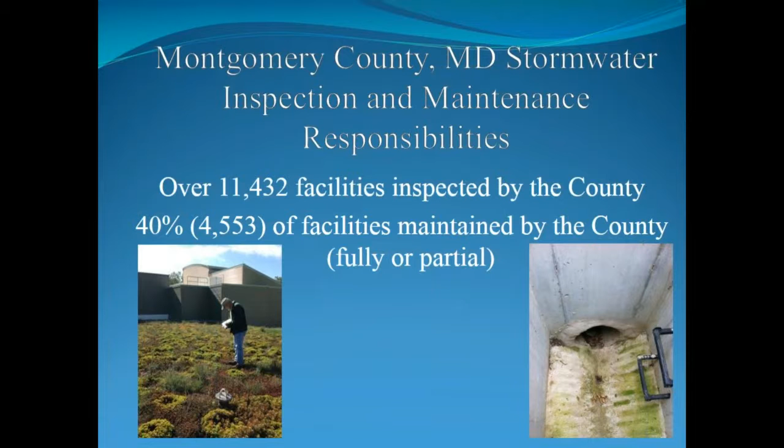About 40% of those facilities are actually maintained either fully or partially by the county themselves, both on public property and within what we call our transfer program, where private property owners can transfer their stormwater facilities into our program. There, we maintain the structural part of the facility and they maintain the landscape part of the facility.

Of those practices, we're quickly going to see that we'll reach probably 50% or more in terms of those practices being ESD or LID practices—the small practices that are green, typically have things growing in them. The number keeps growing, but right now about 42% of our permitted practices are within this category, and I think we're going to see that across the country as well. This is a list of how that breaks out; you can see the bulk of the practices that are permitted are dry wells, a rather large number there.

The two columns here, the permitted ones have to go through permitting services, meaning they're regulated by law. The Rainscapes projects are voluntary projects that the county assists with funding for people to do on a voluntary basis.

Our second largest number is in the bioretention, microbioretention, bioswale, rain garden group, and that is forever growing as well. Then we have dry swales, microinfiltration, porous pavement, tree boxes, green roofs, and rain barrels and cisterns, sort of going down the line in terms of the numbers of practices that we have.

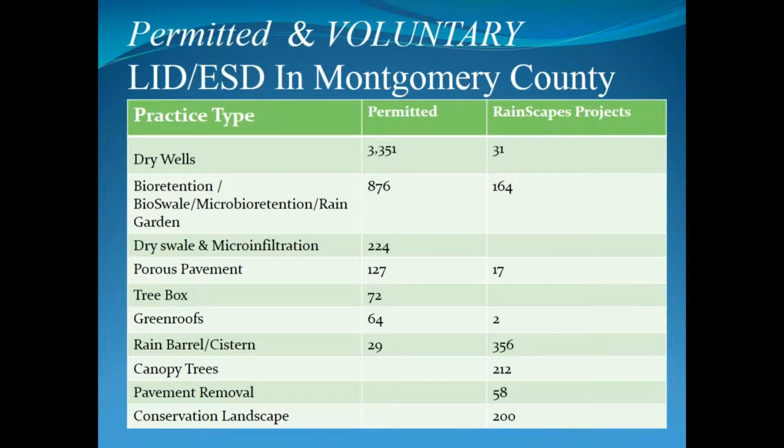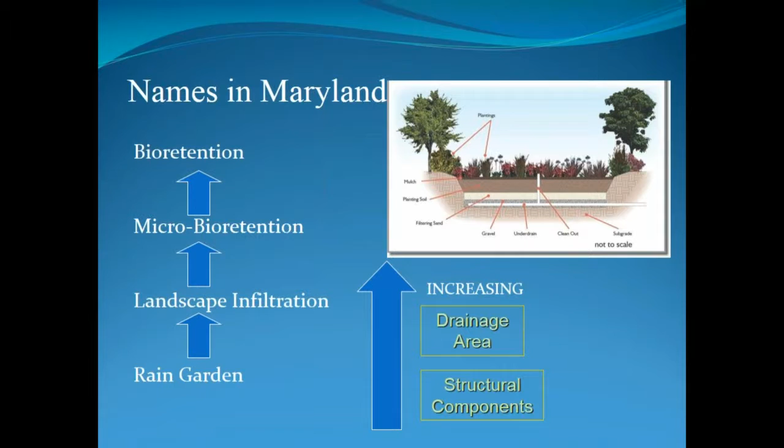In Maryland, every state is different, but here there are different names for how things are categorized, starting with green infiltration practices at the bottom. We have rain gardens, then landscape infiltration, then microbioretention and bioretention. As we go up, they have more structural components and a larger drainage area. The rain gardens are smaller with less structural components and less water, while the bioretentions at the top have a lot more structural components and drain larger areas.

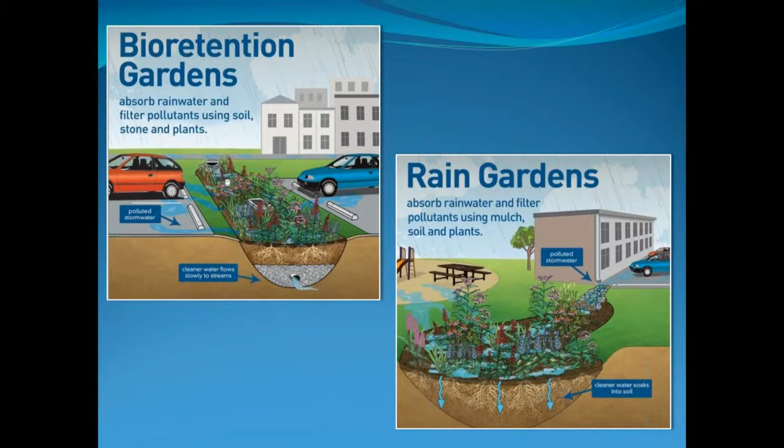The bioretention gardens and rain gardens are the terms we use most often, and I'll probably just refer to them as bios or rain gardens throughout the presentation for ease of presentation.

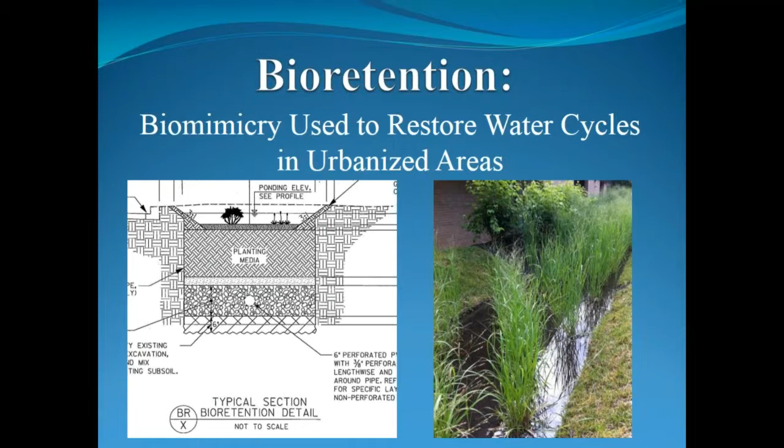So what is bioretention or rain gardens? It's really biomimicry we're using to restore the water cycles of our urbanized areas. We're essentially trying to make them act like the woods or meadows would have done. Typically they have a gravel storage base underneath a very loose planting media that's planted on top, and some have under drains or over drains that take excess water out. The idea is that water is slowed, cooled, and cleaned before it makes it back out to the streams. It can work very well when it's designed right and if there's a maintenance program going on with it.

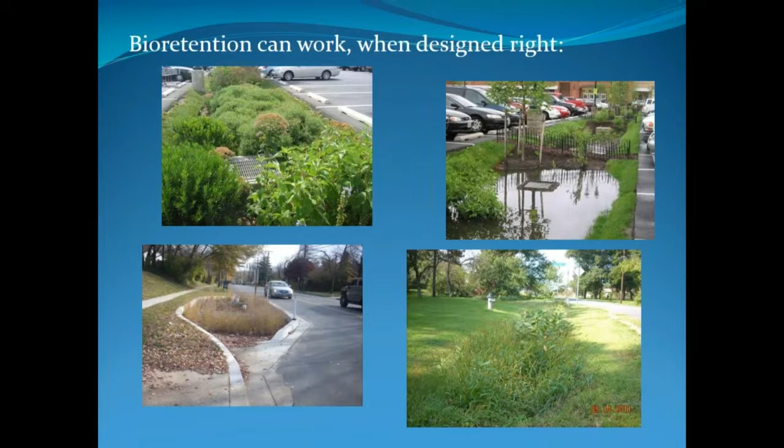So these are some photos of well-maintained, working bioretentions or rain gardens that we have around the county.

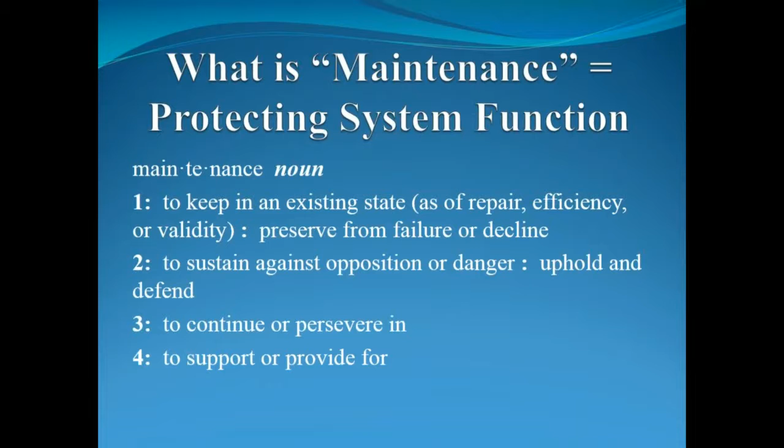So what is maintenance? If you take it out of the dictionary, this is what you see. And this is what a lot of people forget that we need within our systems, our budgets, and our programs. But basically it's protecting them against the influences on them, preserving them in the state they're in, and keeping them from declining. So this is what our program is doing on a daily basis.

This is what we have to do. If we're going to use a bathroom, we have to clean it. If we're going to use a ship, we have to clean the holds. If we're going to use our cast iron pots, we have to take care of them. There's nothing different about the landscaping budget, and I think we just have to get that into people's minds and make sure we're not building things without a maintenance budget.

So quick review of all the things that are in stormwater, and again, I'm going to focus a lot along the roadways, some of the major impacts that I have.

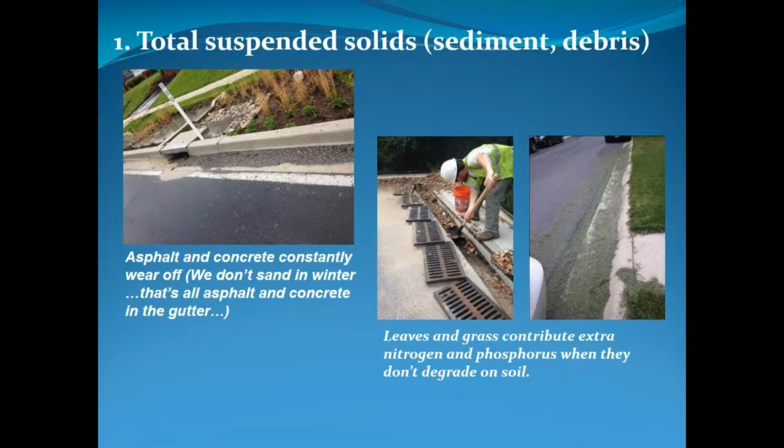We have huge volumes of leaves and grass clippings and organic materials falling into our roadways as well. They're contributing nitrogen and phosphorus because if they're not degrading on soil, they're going straight into our water bodies, which end up in the Chesapeake Bay.

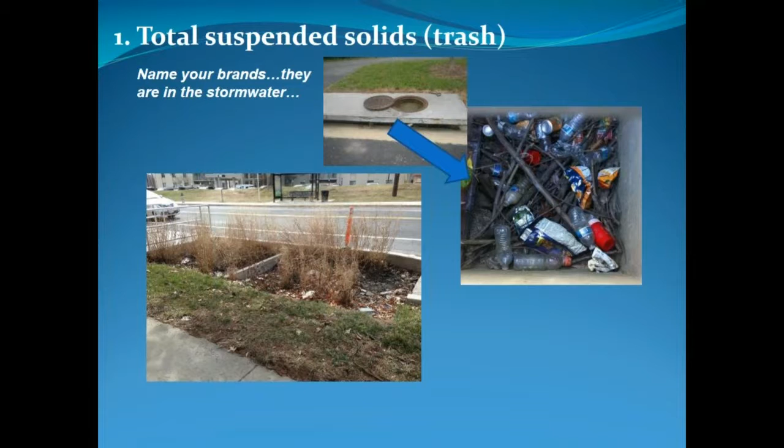Then we have tons of suspended solids, especially things like trash. We've got that no matter where you are, but as you get into more urbanized areas, there just tends to be a higher volume of trash for multiple reasons.

Then there's the chemicals, a lot of these things that people don't actually see that are going into the water. We've got heavy winter salting that happens around here. Every time you hit the brakes on your car, heavy metals fall off of those brakes and end up on the roadways and then in our stormwater.

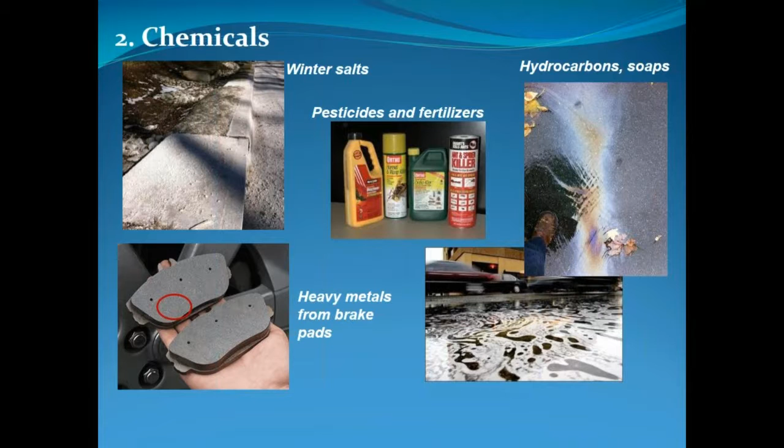We've got all sorts of pesticides and fertilizers running off of lawns, plenty of hydrocarbons, petrochemicals, and soaps coming off of our vehicles and buildings, and from illicit discharge as well. All of that is impacting what goes in there. Then there's even more unseen things like bacteria coming off of trash cans and from animal waste. We've got superheated roads when the sun is shining on them, and that heats up the water, which can impact aquatic life. And then, of course, we have the concentrated stormwater, which is one of the largest issues in terms of the health of our streams.

So these are some pictures of some of the things that we clean out on a regular basis from our roadside stormwater systems. The upper left-hand picture has tons of cigarette butts and just organic debris. We've got trash, we've got sediment. The lower left-hand picture, that bucket, is the type of sediment we get when water mains break. So instead of the water main break going straight to a stream outfall, it goes into our roadside LID, and we have to clean those up as well. Lots of things people don't think about.

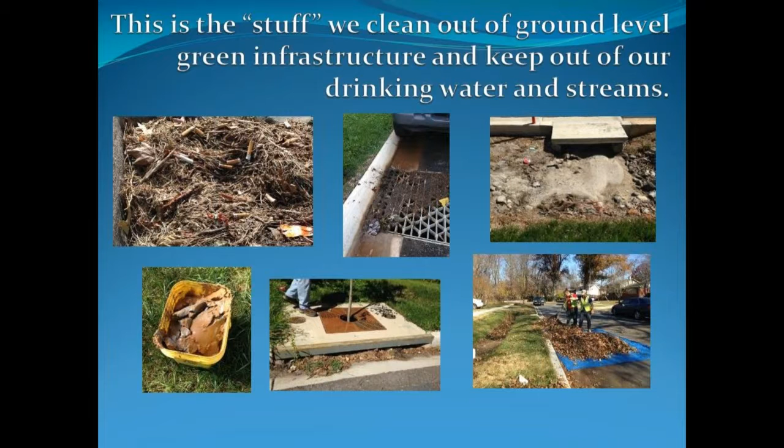Google isn't driving cars for us yet, so we get vehicles in it. We've got people in them, we've got kids in them. You name it, we've got the impact.

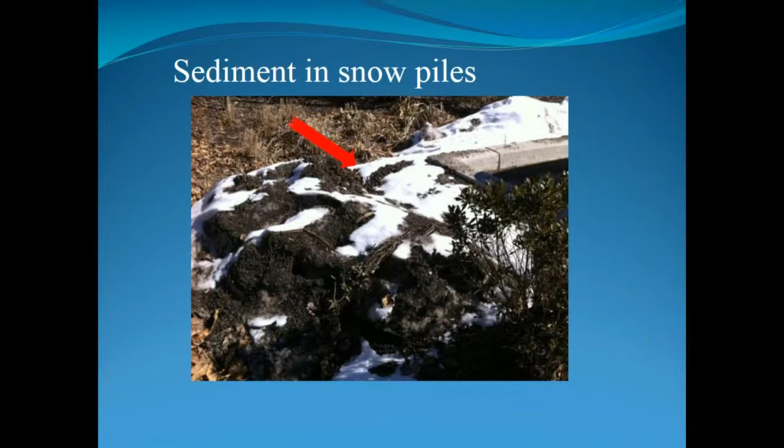So sediment is a huge issue. As I showed you before, there's a lot of sediment, but also when we push snow around, there's a lot of sediment that ends up in that snow. This sediment pile is actually in the inlet of a road or parking lot bioretention, and all of that sediment in that picture came in with the snow that was being pushed directly into the facility.

We did a study a few years ago of roadway sediment within the county, looking at multiple sites where we had roadside LID. Right before our crew would go out on a monthly basis, they would take out and measure the volume and weight of the sediment, and then characterized the nitrogen in it as well. They would dry it down and found that for every inlet, they were getting 4 to 9 pounds of dry sediment every month. That meant 52 to 104 pounds of dry sediment per inlet per year. When we multiplied that by the number of roadway LIDs we had at the time, it meant we were taking out quite a few tons of dry sediment per year just from what was coming off the roadways. That's pretty significant.

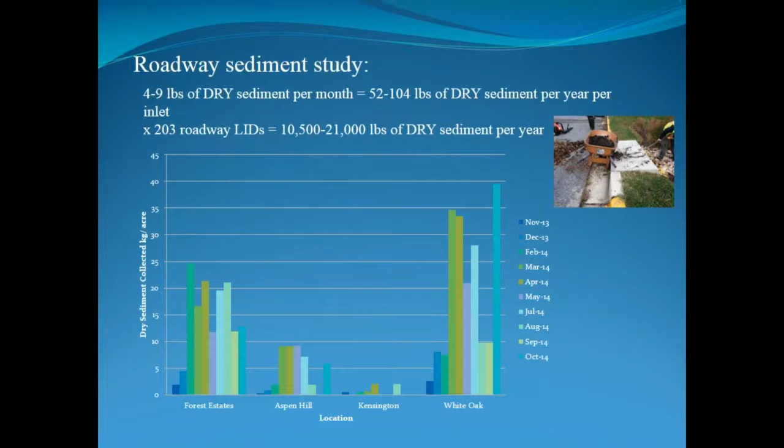So just a quick stop there before I get into maintenance. Sylvan, is there any questions so far?

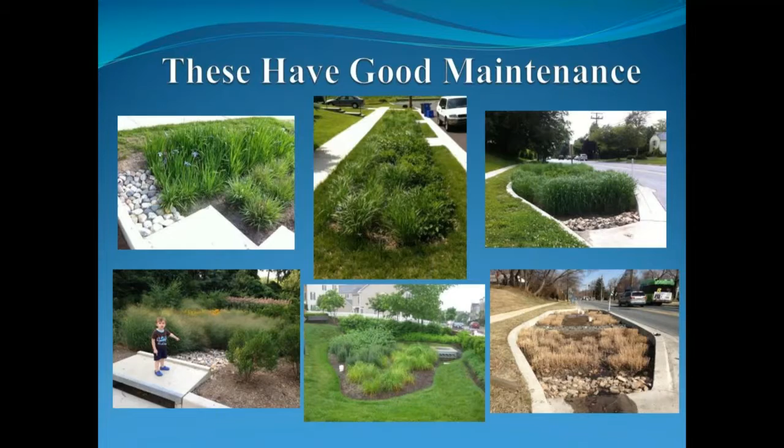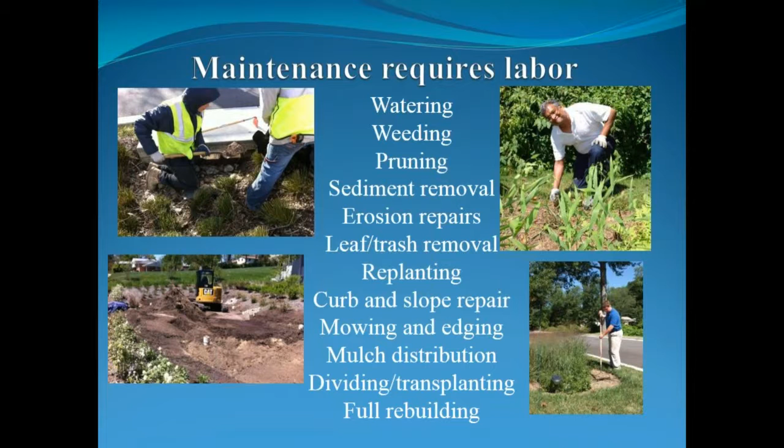So maintenance requires a lot of labor, we know that about all things. This is a list of all the types of things we're doing on a regular basis. The things towards the top we're doing regularly, like weeding and pruning, taking out leaves and trash, mowing and edging, redistributing mulch after a storm. Some of these, like fully rebuilding or replanting them or patching erosion, are on an as-needed basis, but they're something we always need to be able to budget for in all of our facilities.

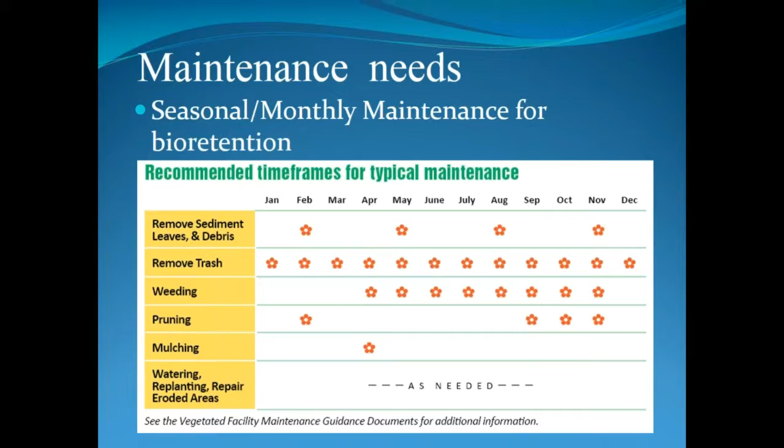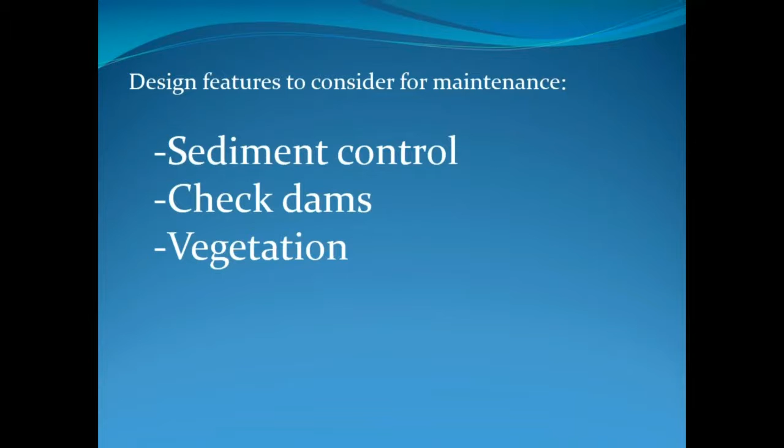Just want to go through some design features that make a difference for maintenance. There's all sorts of different ways that people are controlling sediment in these, different designs of check dams, and different types of vegetation. So I'm going to go rather quickly through the next set of slides just to give you an idea of the diversity of things we're dealing with and that you may deal with as well.

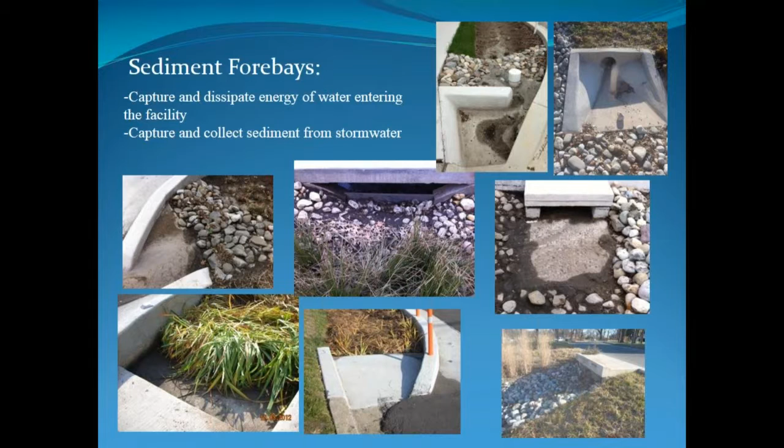Sediment forebays, these are all different kinds of forebays in our LID practices. We have to recognize that these small LID practices, particularly along roadsides, don't really have a traditional forebay—there's no room for one within them. So the facility itself is almost a forebay in and of itself, but we'll essentially have these micro forebays, and these are the different types we see within our facilities. This is one type where the water just drops over and dissipates a little bit of energy as it comes out, and there's a concrete pad where we can scrape the sediment off.

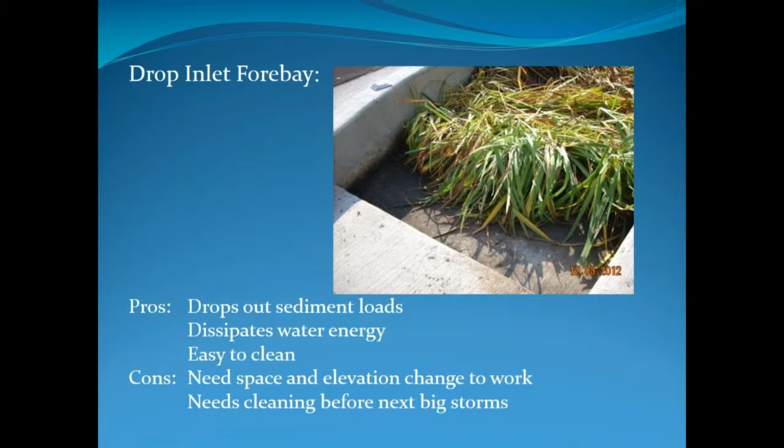I've put on here pros and cons of the different types of forebays. Another forebay is not too different, where there's a pad that the sediment can drop out on, but also with the flow of water coming in, we're trying to have it bump up against this little Z-shaped inlet curbing so it will slow down and capture that sediment. You can see, though, even after a big storm, it will push the sediment past that area if you're not cleaning it out regularly. Then we just have flat concrete forebays where water literally just goes into them.

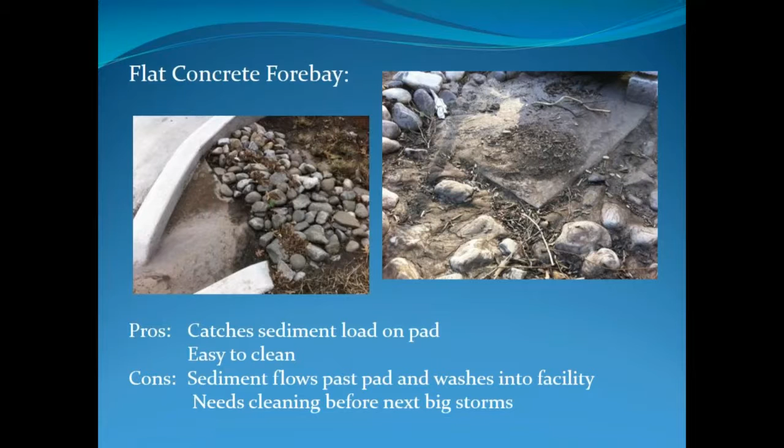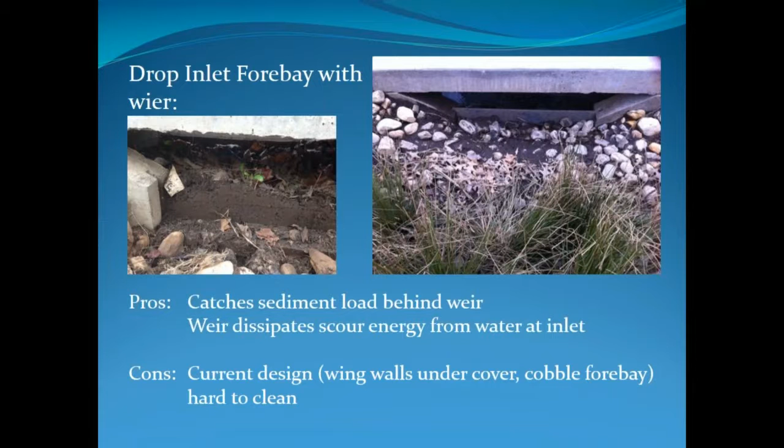There is no dropout—there might be cobble to dissipate the energy. And then we have some that have weirs. The picture in the upper right shows a large plastic weir that can be lifted out, and on the bottom left you can see where that weir was pulled up and the amount of sediment that got captured behind it. The weir has holes so that we're not holding water within the inlet, but we're holding sediment within the inlet that we can then clean out rather than have it get into the facility.

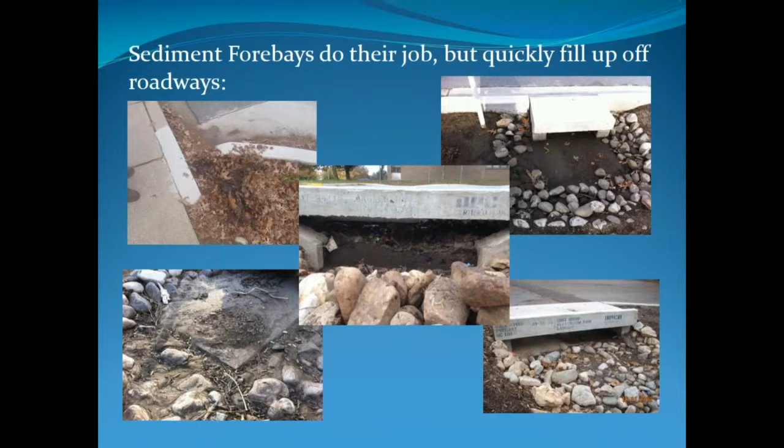They do their job quite well sometimes, but they quickly fill up, especially along roadways, with the amount of organics and inorganics that come into them. So on a monthly basis we need to keep cleaning these out, otherwise they very quickly get filled up. Also, sediment will move past these forebays—the volumes of sediment from roadways can be really heavy, and if you have sand in your community for winter use, you're going to have even more than we do.

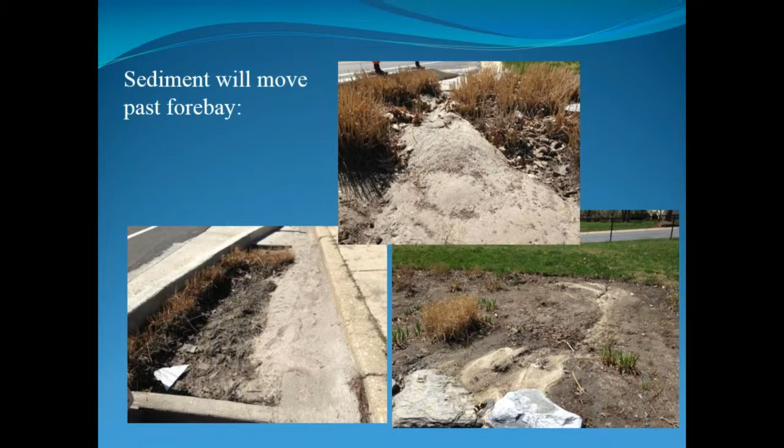Here's just some pictures of sedimentation where it's moved beyond the forebay. This is after winter, where heavy winter storms, etc., and we haven't been out there maintaining—that's how much sediment gets past the forebay and into there. It's rather large volumes. So one thing we do is constantly clear the sediment and debris from the inlets, and we also clean upstream of the inlet, so after the next storm whatever's within 5 to 10 feet above that inlet ideally isn't flowing into it. Otherwise, it's a little bit harder to clean out.

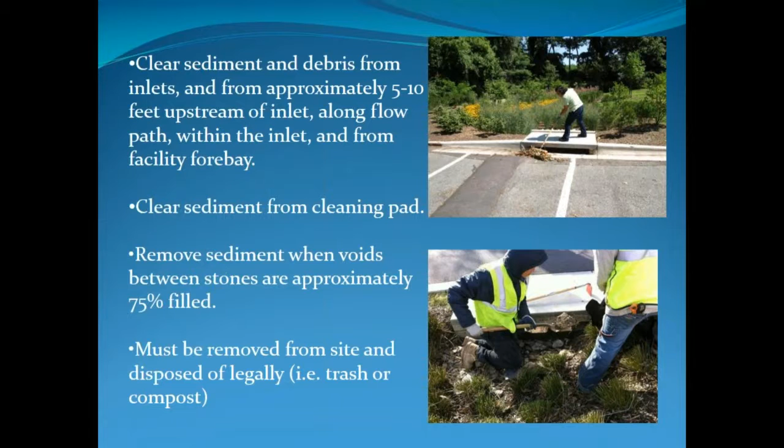We're cleaning out the sediment from the cleaning pads below the inlets. When the stones past the inlets are filled by approximately 75%, we're lifting the stone out, taking the sediment out, and putting the stone back in. Then, of course, this has to be taken off site—there's nowhere nearby to just toss it, so it goes into the trash or into a compost facility. Most likely it's going to go into the trash if it's not leaves.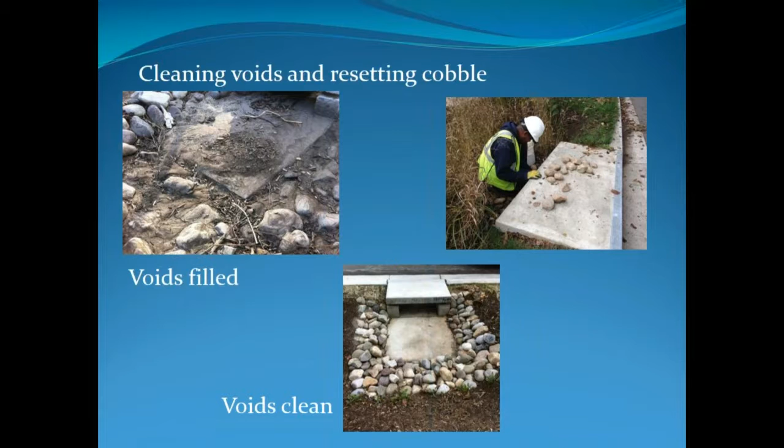Without frequent maintenance, our inlets can look like the one at the top, and with frequent maintenance, they look like the ones at the bottom.

We also have trench drains that feed facilities, and people often forget about drains that are not immediately adjacent to their facilities. So it's always important to go upstream and look at where the water comes from and clean those out as well.

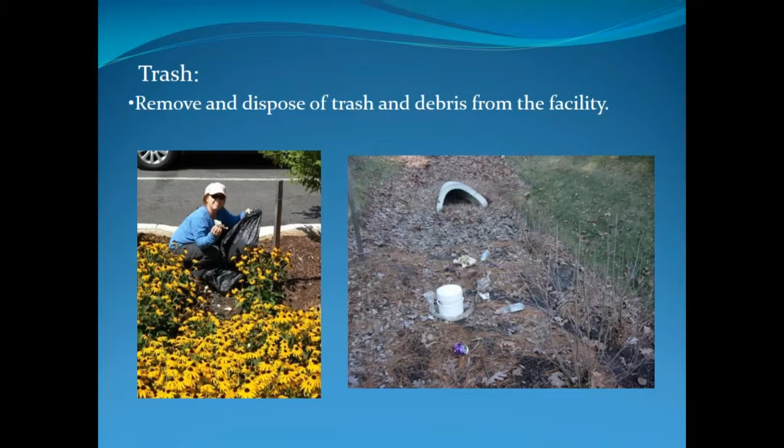We're constantly taking trash out of them, as well as debris and leaves from within the facility. If we can capture that at the inlet, it's going to save us a lot more work before it moves past the inlets.

We also have to take trash and debris from control structures. There are flow splitters that go to some of these, and again, we've got to have our crew know what's upstream so they can go and lift the manholes and clean them. Facility control structures sometimes have trash in them, and it's not just from stormwater.

The bottom left-hand picture shows kids throwing stuff in there, because those large bottles did not fit through those grates unless somebody forced them through. So we've always got to look at all of our upstream and downstream control structures to take trash out.

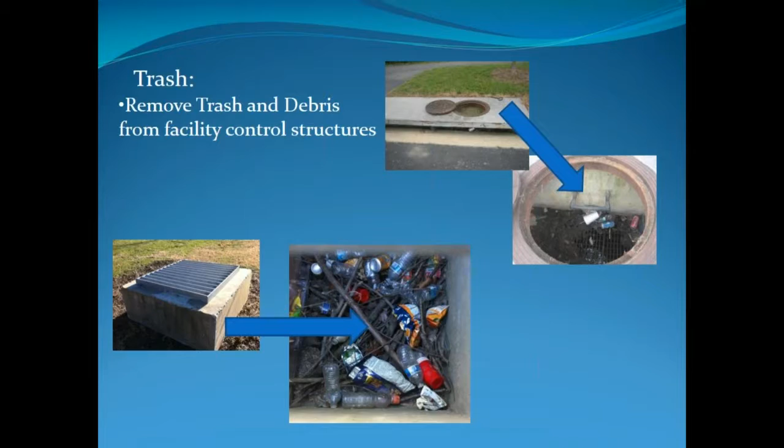As for leaf and natural debris, it's the time of year in our area where leaves have started to fall, and we are taking out large volumes of leaves. Because stormwater facilities are usually lower than the surrounding grades, they sometimes get even more leaves in them because things like to blow downhill and into them.

That's a large job in the fall that has to be factored into our region's maintenance.

Any questions, Sylvan?

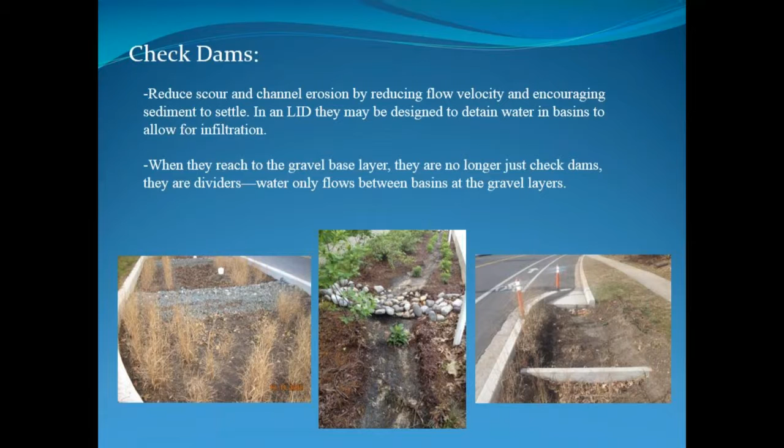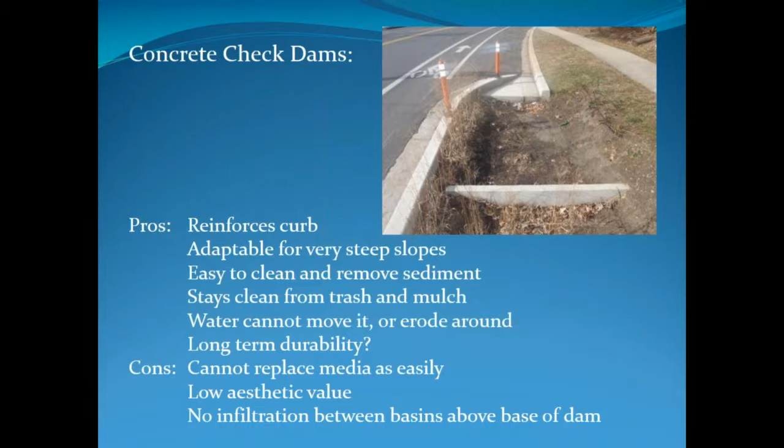Another style of check dam used is gravel check dams. These are basically soil and gravel packed together to create more of what I would call a berm than a check dam. They lock together pretty well and are pretty resistant to erosion.

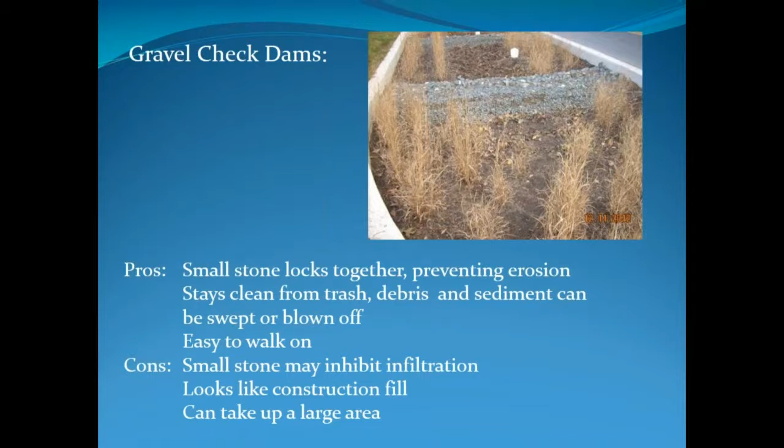They're relatively resistant to cars driving over them because they have to be a little more bulky, so they provide a larger apron if something travels over it. Water can't get through them, much like a concrete check dam. It has to go up and over them.

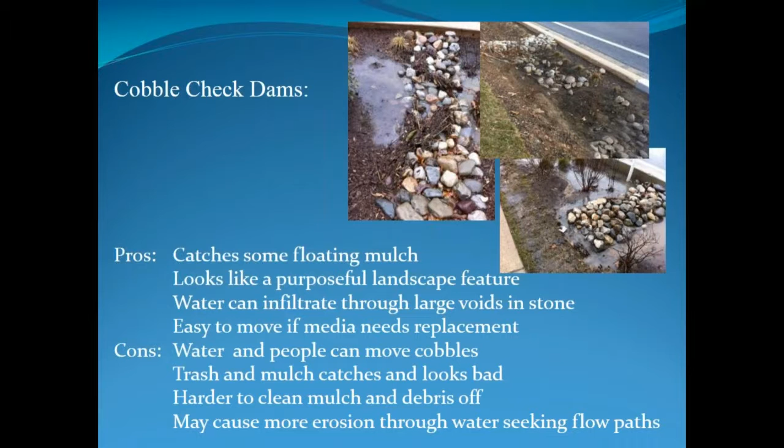A lot of people are now using cobble check dams, or river cobble, which is perhaps more visually acceptable to the public, but those cobbles move and get dirty pretty fast catching sediment and debris. With a concrete or gravel check dam, debris doesn't get stuck in it and you can take it off easily. Cobble check dams are a fair bit more maintenance, at least in my experience.

Vegetation is one of the most critical things to a lot of these systems. It's also an engineering component, not just for transpiration and evapotranspiration, but the roots provide infiltration channels and keep the soil loose. They also slow down and help cool the stormwater. So the maintenance and choice of vegetation is really significant.

All the vegetation has to be appropriate for the use. This is one of the major challenges in balancing aesthetics of these roadside and other facilities with the engineering component, since these facilities are sometimes exceedingly wet, and when not wet, might as well be a desert because the soil is so well drained. We have a very limited palette of plants that can handle conditions where most of the time they're dry and stressed, and every so often their feet are wet for a day or two.

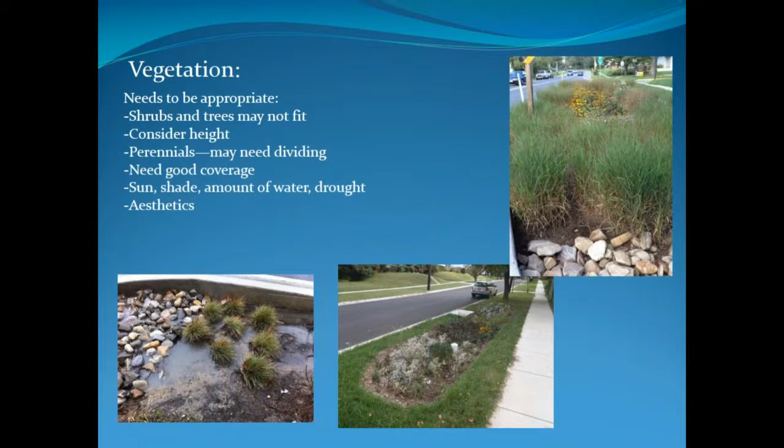And then, of course, we're trying to balance the aesthetics as well as things like sun and shade and sight lines.

Keeping that vegetation well maintained, one of the most important things we're constantly doing is removing weeds. This was a really bad year for weeds in our area, so it took a lot more effort than some other years, and weeds are constantly popping up through the seasons.

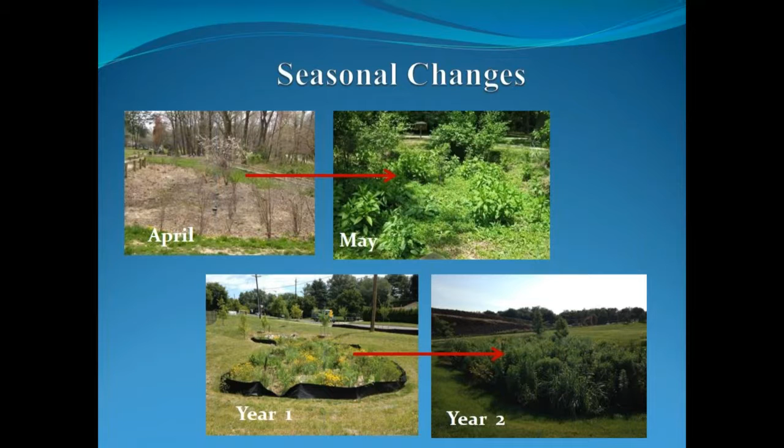We've got major seasonal changes both within one season and within growth years. The upper picture is the same facility in April and then May, showing how quickly it changes. The lower facility shows the difference between the first year when it was just built and the second year - those plants are now 6 feet tall. A big difference in what we see and how maintenance changes throughout the year.

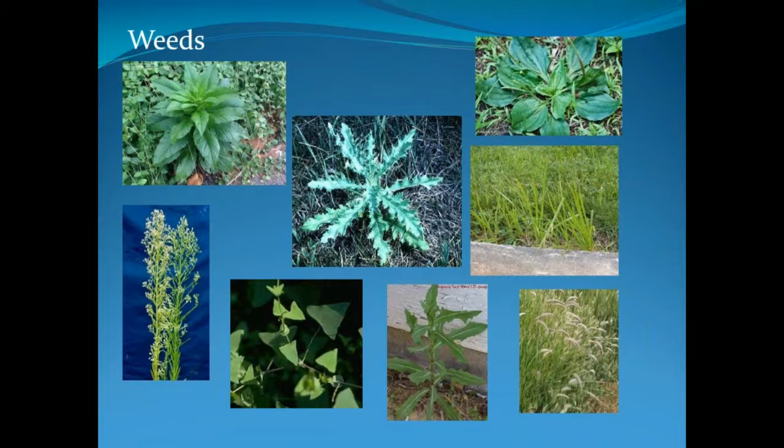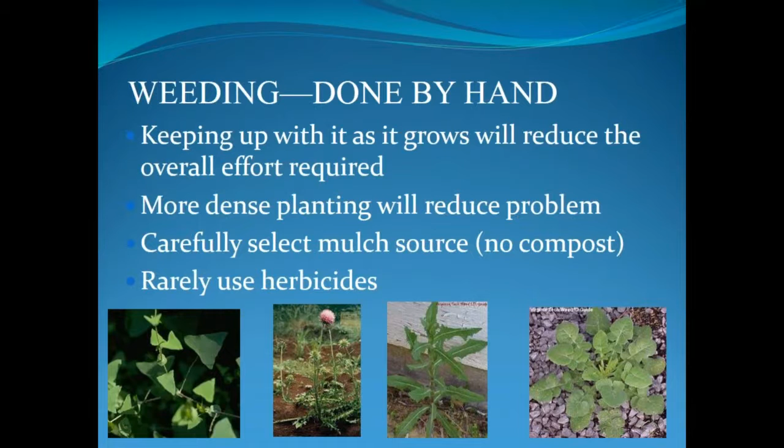We do all of our weeding by hand. We don't do any chemical weeding. The denser the planting, the easier it is to maintain, and keeping up with weeding efforts means it's not as bad the next time you show up. For mulch sources, it's really important to avoid municipal mulch compost that can have a lot of seeds in it. It's very rare that an herbicide would be used - that would be under an extreme situation.

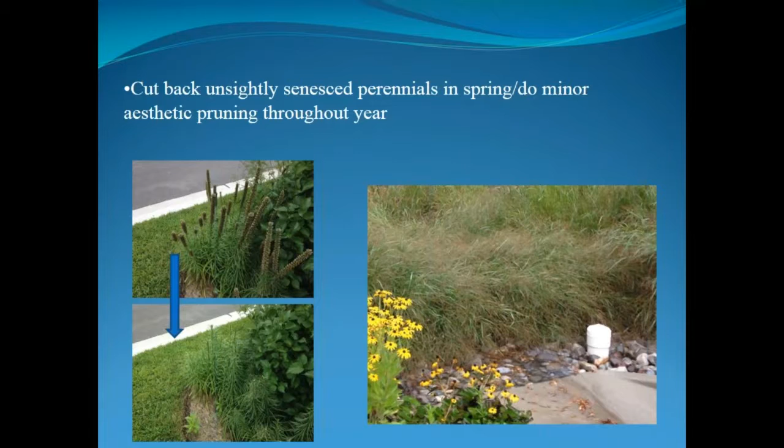Some pictures of well-maintained vegetation. We cut back unsightly perennials and do aesthetic pruning throughout the year, but typically prune in the spring and let things stand in the winter. There's a couple reasons for this - one is that a lot of these facilities have mulch. This facility had been pruned before winter, and this is what it looked like in midwinter because the mulch floats, moves around, and buries it. If the standing plants are left there, the mulch doesn't move.

Also, because these are stormwater facilities, there's a higher risk of root freeze if the plants are cut short - water can get into the roots and take on freeze-thaw action, busting apart and damaging the root ball. Then we might have a higher mortality rate. So we typically don't do the extreme pruning until spring. Another thing we do is constantly redistribute mulch.

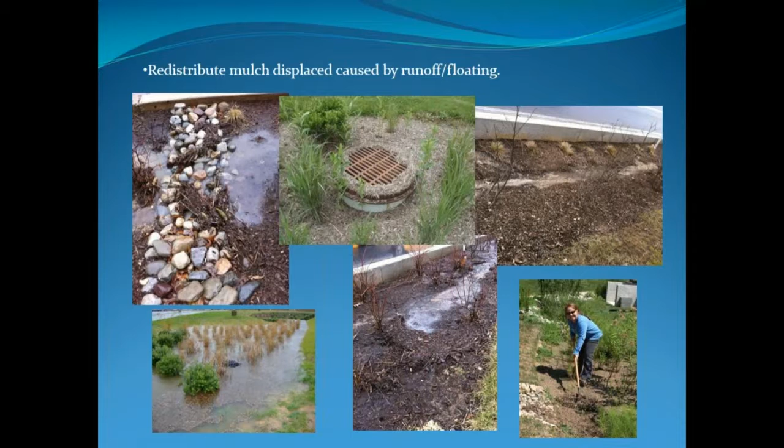This is why having a denser planting really helps a lot, so that you don't need as much mulch, because it doesn't really matter what kind of mulch source you use. They all float, some better than others, and can go out of the facility as well as bury plants within it.

Watering is usually only done until these plants are well established. After establishment, if they're drought stressed, it's very beneficial to water them, but that often falls off the radar as something to do.

Perennials can be divided. If you have a facility that is lush and has some excess, you can take it to one that's not as lush by dividing perennials. And then replanting is a rather frequent exercise, particularly along the roadway LIDs.

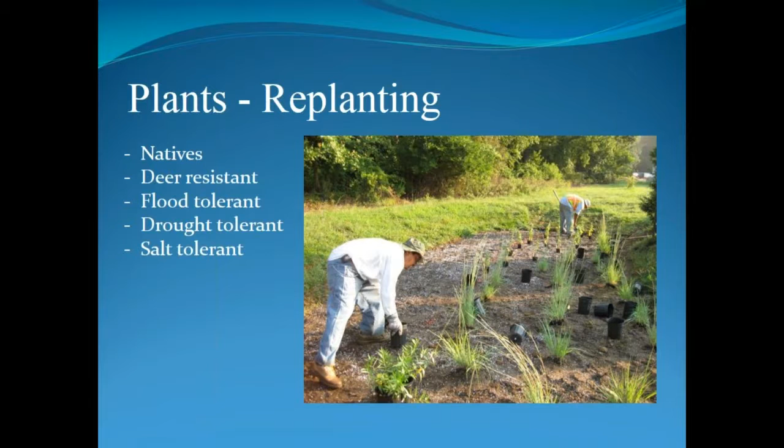As I mentioned, these plants are an engineering component, and therefore they're subject to scour, sedimentation, petrochemicals, and all sorts of things. So many of them are sort of sacrificed to the stormwater gods and need to be replaced either in full or on an annual basis.

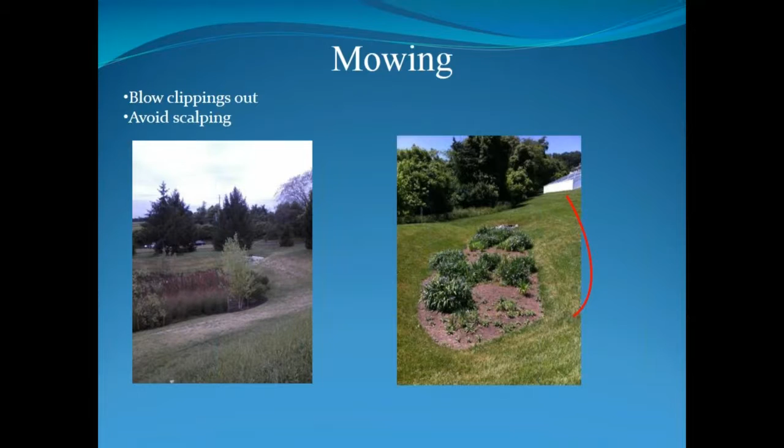Mowing is a really important thing that happens around these facilities. It's important to inform the folks who mow to raise their blades and prevent scalping, and to blow their clippings away from the facility, or if clippings go into the facility, to blow them out when they're done mowing.

We don't want grass clippings in the bios for several reasons. One is they contribute a heavy amount of nitrogen and phosphorus to the stormwater system, and the other is that they can clog up the facility by creating a dense, rotting organic material on the surface.

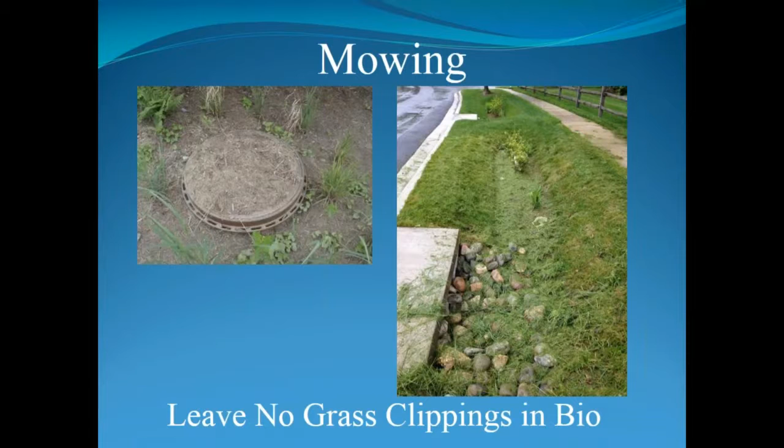Having a good edge around your facility will help a lot to keep mowing personnel out of the facility. It makes their job a lot easier, and it makes your job a lot easier as well.

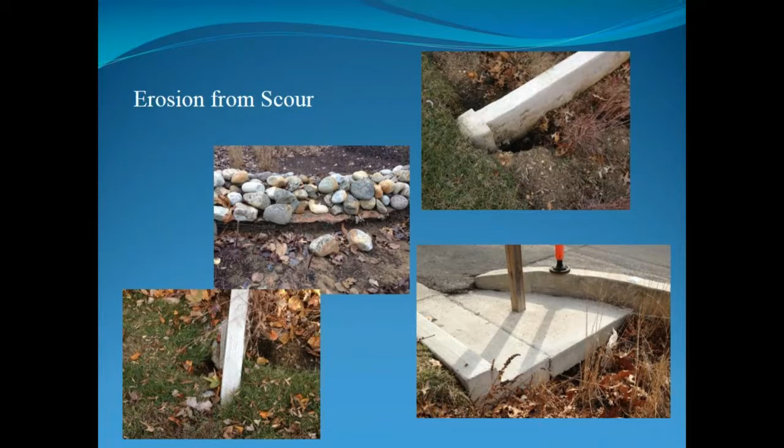We have erosion that we have to fix from scour, and these are just some images of the types of erosion and undercutting that can happen within the facilities. So repatching those erosive areas, moving cobble back into place, and rebuilding up around check dams is common practice.

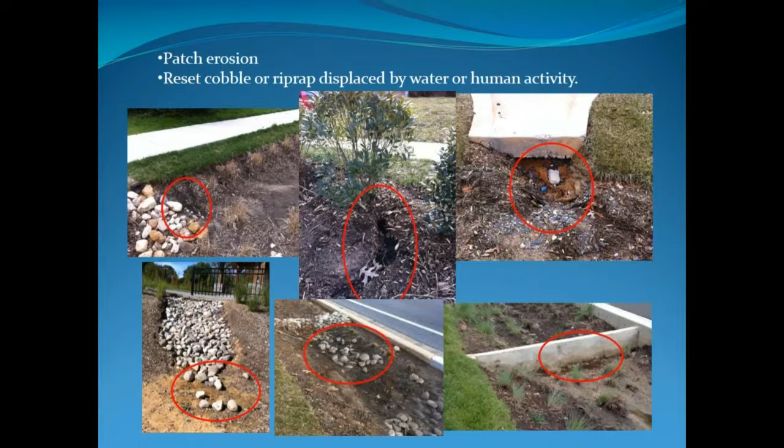And then we like to educate people. It's really difficult now that LID and ESD is used right adjacent to parking lots and homes. In a big storm, where are you going to put the snow? I think it's great to inform people not to put snow there, but the reality is you have to design for snowstorms in our area.

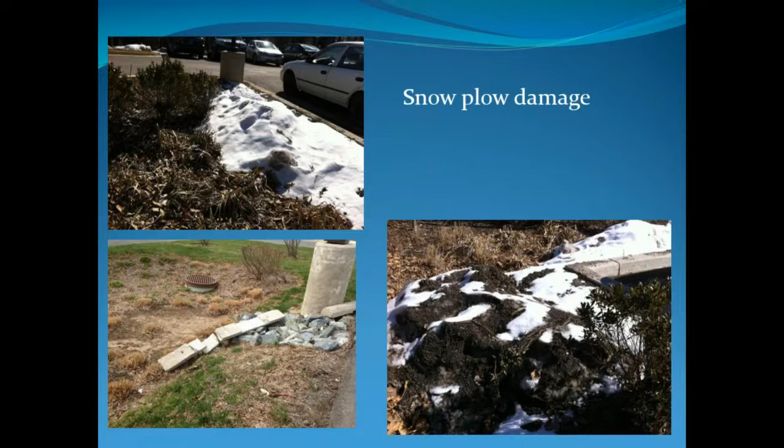These are pictures of snowplow damage. So after winter, there's often a lot of repairs that have to be done from snow and snowplows.

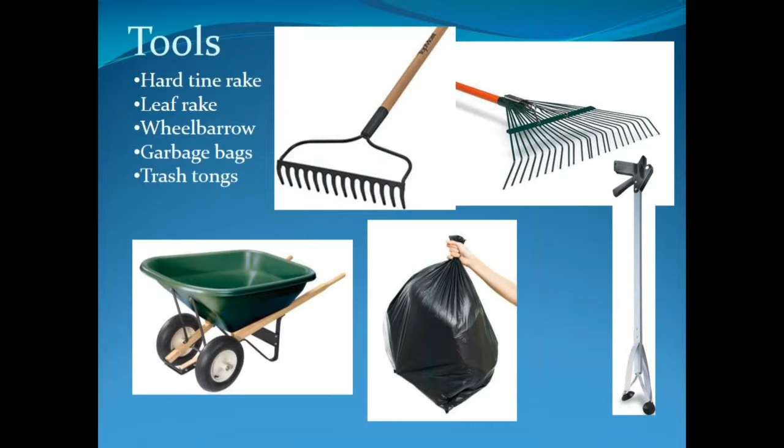And then these are the tools—I've got a couple of slides. These are the things that are typically on the truck with our crews: buckets, flat shovels, hose. You could get creative and use a shop vac, brooms for cleaning up, both hard tine rakes and leaf rakes, wheelbarrows to get between the facilities and the trucks, garbage bags, and trash picker-uppers are great.

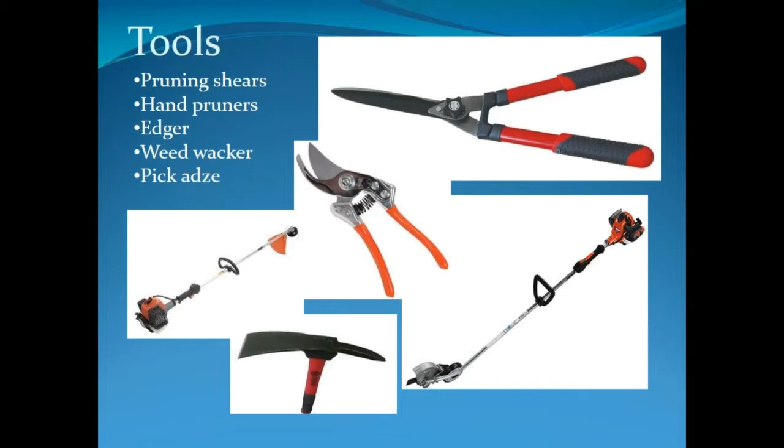And then all the types of things that we need to prune and edge and keep the trimming down. We also want to have tools on our trucks—you'll find that getting a trench drain out or opening up a riser or taking a manhole cover off, you've got to think about the metal stuff needed to open and close those things. So having a manhole hook and having your wrenches and things like that are pretty important.

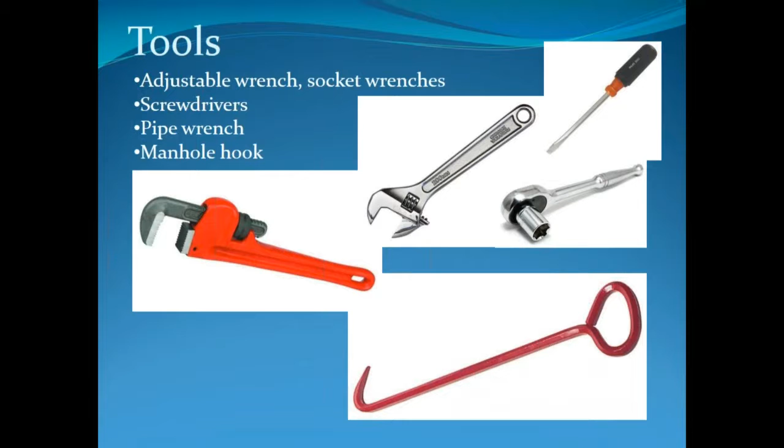It's also important to make sure that your crew is visible, particularly along roadways, but it also really helps no matter where you are, because there's something about a safety vest that seems to make people bug you less, since you look like you have a reason to be there and not just a stranger tromping around digging in the dirt. So making sure that's important.

Real quick before I take some questions, let's briefly go over the types of things you need to maintain grass swales. There's a lot less maintenance, obviously, but you have to keep the inlets cleaned, keep out leaves, and be careful about mowing and scalping.

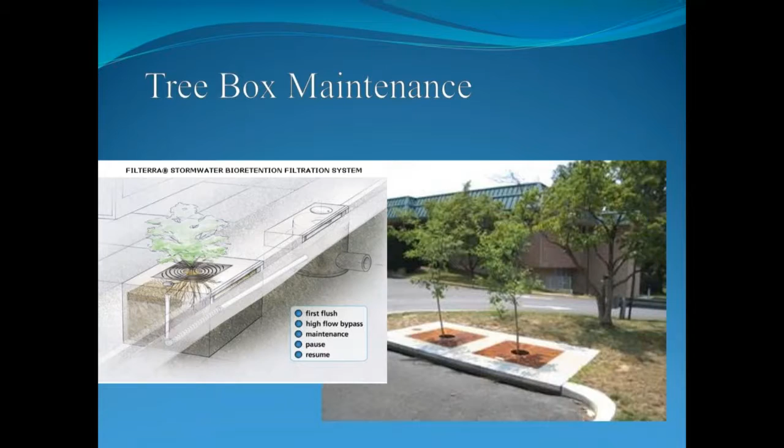Tree boxes are becoming more common in a lot of places. Keeping the inlets clear on those and following the manufacturer's suggestions on what types of maintenance you have to do within the tree box is important. These are the things we have to do in our tree boxes on an annual or biannual basis, including remulching within a lot of these facilities.

Those look like wonderful resources that you have on your site. We do have a question from Alex Crofta about weeds: do the weeds have a negative functional impact on the system besides competition with plantings, or is it mostly aesthetic?

It's competition with plantings, number one, and aesthetics is number two. I don't think there's any research out there that shows a negative impact of the weeds. One of the problems with some of the weeds is that a lot of them are annual weeds, and those annual weeds then break down and they still have to come out of the facility, because if we leave them behind, we again have a high nitrogen and phosphorus input within the facility. It's not like a regular garden where we could till or compost it back in.

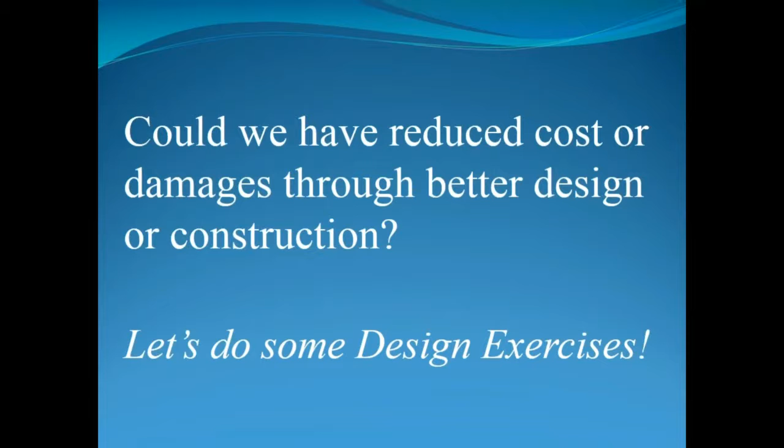Those are the only two questions we have for now, if you want to do some of the design review. Great. So what I want to do is go through a couple of designs, and since you're not in the room, you're going to have to answer these questions in your head yourself. I'm going to show you some designs on plan, and I want you to think about what you see that might influence both the construction and also the maintenance and effectiveness of the facility.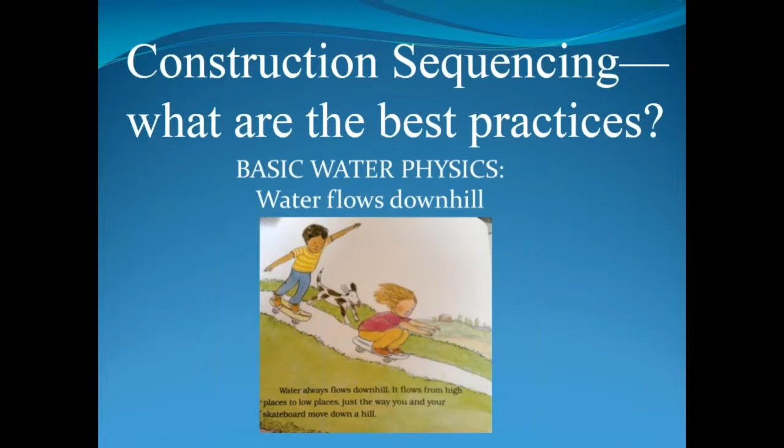There's nothing that can keep back that amount of runoff from an unstabilized site in a very large storm. These facilities were completely breached by exceedingly high sediment loads. And not only that, they had planted and mulched this stormwater facility before they even stabilized the surrounding area.

So this entire facility had to have the top several inches taken off, the plants taken out, and the mulch taken out to repair that. So it's really important to think about how these things are sequenced. Why this was finished before the rest of the site is something that, if you have any control over the construction and sequencing and design of these things, you may want to be having them think twice about that.

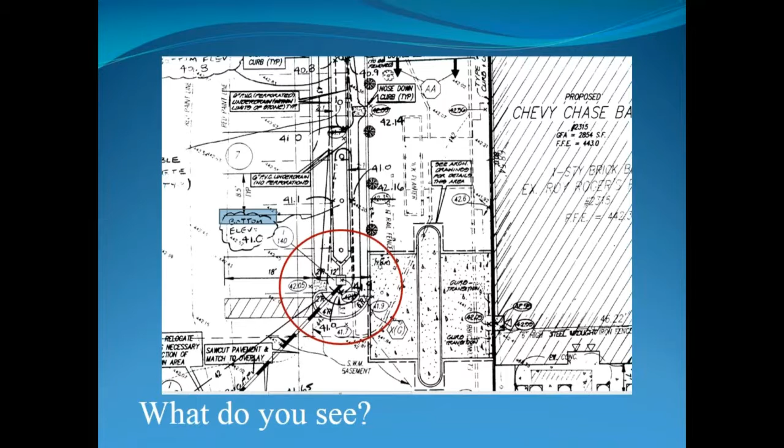So if we go back and look at that, there's a couple things that should have been caught. One is that outlet riser should have been in a totally different location, not right at the inlet. It also should have had more specifics about the elevations of where that riser is and how it's functioning, because we got a non-functioning facility.

So in terms of maintenance, I don't want to maintain this facility. I don't want to budget for maintenance because I don't have anything to maintain, since this facility isn't accepting water. So we would want to see this modified before anything changes there.

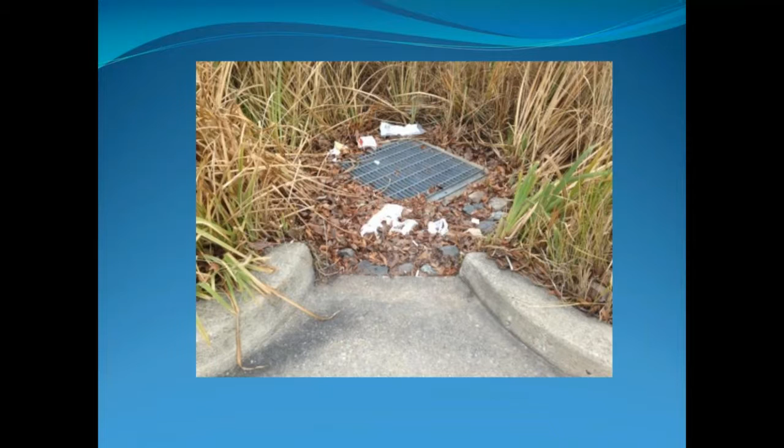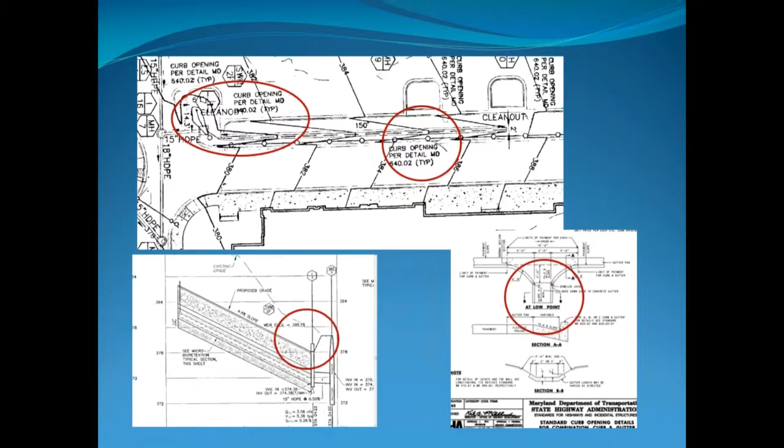So you want to think again about when they constructed this and exactly how it's going to work. Everything's on a micro scale, so we've got these tiny little grade lines. It'd be really hard to construct this per plan, but when they did, this is what we got.

So again, going back to this, this is not really a buildable site, but they built it anyway. Now I have a major maintenance issue because I'm always going to have massive scour coming off these inlets. There's no cobble or splash pad or anything preventing the undermining of some of these curb inlets. And I've got this riser sort of buried in a deep little gully at the end, because they did their best and figured it out, but there really wasn't enough detail in the plan. Now my maintenance is more of a recovery effort as opposed to routine maintenance.

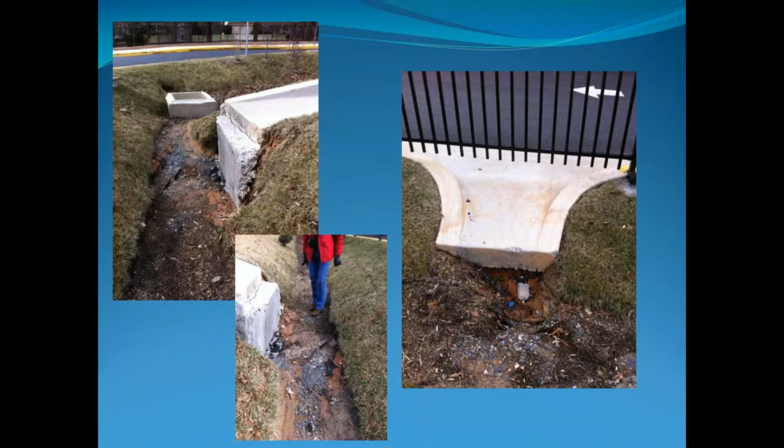I want you to think briefly about whether you see any issues with the interaction between the inlets and the underdrain that are in here. You wouldn't really notice this until you go out in the field.

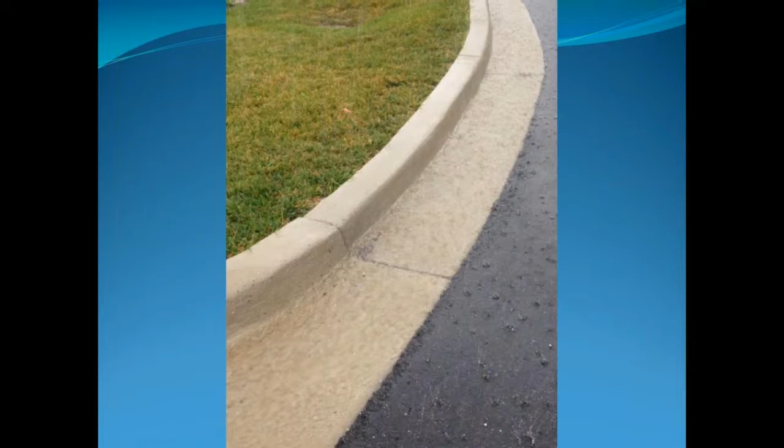This video shows water coming in, pouring in. Again, it's a 4-inch rainstorm, so we've got a massive amount of water. You can see it coursing across the grass at this inlet. There are several inlets on the side, but this is the one I was filming. Water is coming down towards the facility, so I'm still thinking this thing must be a giant puddle of water, that there should be ponding in here, which is what it was designed for.

Then I get over into the facility. Here's another one of the inlets with water gushing into it as well. But when I get into the facility, there is no water. It's just gone, it's dry. It's kind of hard to see in this video, so I apologize, but you can see the mulch as I'm walking along there. This facility should have had 6 inches of ponding within it.

The reason it's not ponding is we go back to the design, and we see that this underdrain goes straight down the middle of the facility. Water's coming in here, I've got a highly drained sandy soil, and it's literally shortcutting the facility. It's just going down through the sandy soil, being intercepted by the underdrain and going back out to the storm drain. So all 3 of these inlets are totally short-circuiting the facility, and in a 4-inch rainstorm, I'm never going to have a drop of water except what falls from the sky.

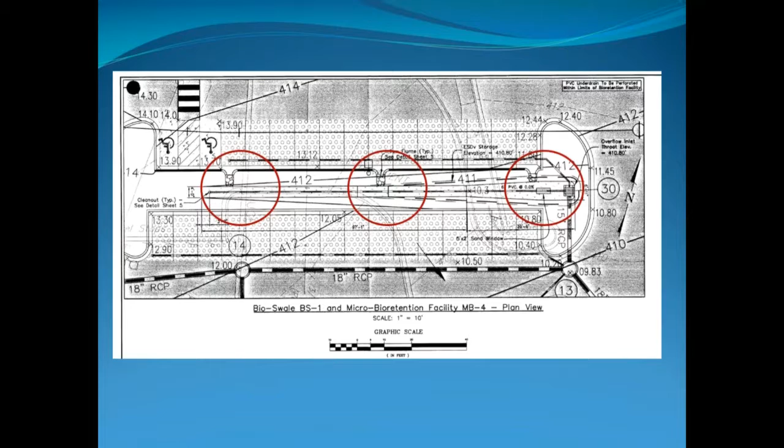I see this a lot, and I encourage everyone who works in maintenance to get involved in reviewing the designs of the facilities they're going to be maintaining, because now I get everyone to correct these issues on their plans.

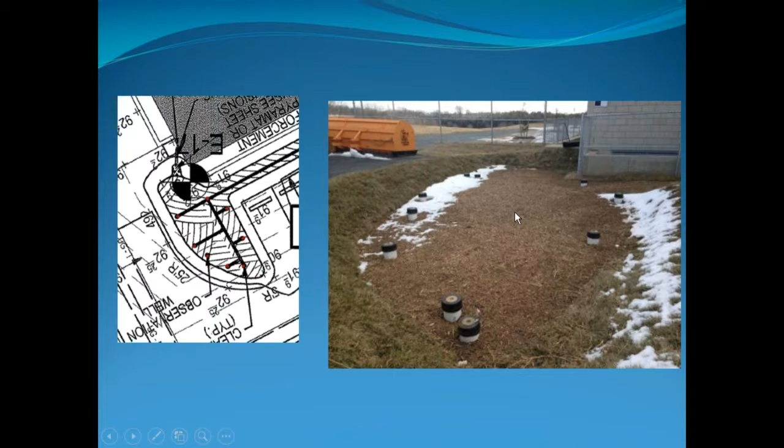Another quick one: you can't really see it at this scale, but I put little red dots where all the underdrain caps and observation wells are. If we count, there were supposed to be 8 caps in there. Now I count 10. So I have no idea at this point what they actually built in here, because this is the as-built plan, and this is reality. Again, maintenance challenges that are a result of design challenges.

This facility—let's look at this. So this is a stormwater facility again.

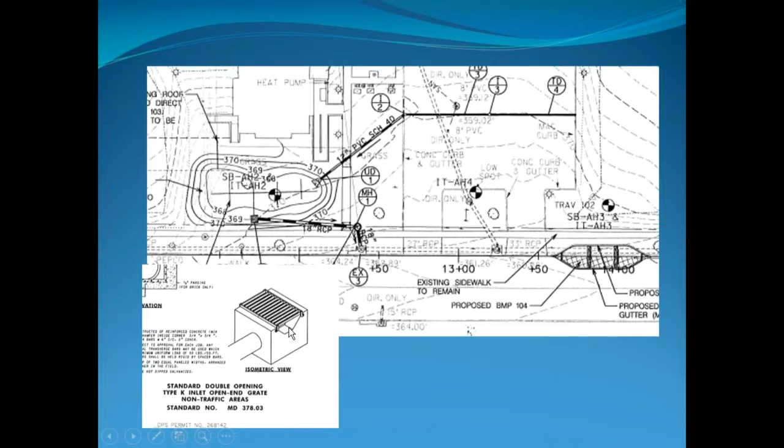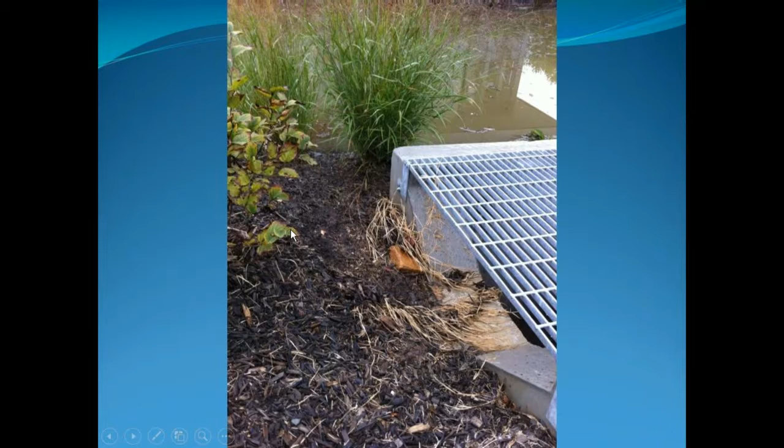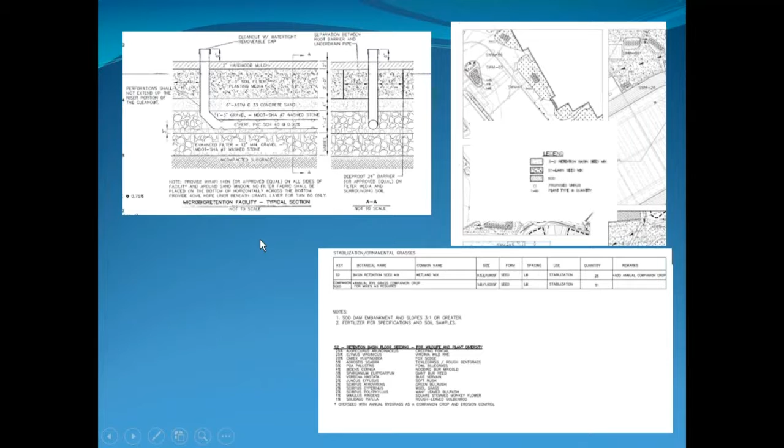This one I'm not going to go into detail, it's too small for you to see the plan. But what you see on this plan is a seed mix, and this is the cross-section of the facility. The cross-section has several inches of mulch, then the soil, then some sand, then some gravel, and an underdrain. Then here's the areas, and they have a seed mix. A problem that folks never seem to notice is that seed does not grow over or under 3 inches of mulch. So we have rules within the county where everything has to be planted with gallon-sized plants unless it's designed differently, because we end up with facilities that have nothing growing in them whatsoever.

I'm going to skip this one, but this one had a large erosion problem. So just some quick lessons learned about looking at some of those designs: there's really not one size that fits all for design or maintenance. Every site is different. But if all these practices are going to be designed at a micro scale, they really need to be reviewed and put on plans in micro scale so that we can actually have them built the way we can maintain them. Field changes are always going to be necessary on the construction side, and that's where the maintenance folks really come into play, because they know what works after it's been built, and their input is really important in terms of design and design reviews. So I definitely encourage people building or changing their programs to bring their maintenance staff into those exercises.

So I like to put this in summary about maintenance: design and construction is like a pregnancy. There's a lot of hard work, careful management, a lot of stress involved. But when you get to maintenance, it's like managing a horde of teenagers when school gets out. There's no telling what you signed up for, and their appetites and clothing allowances are large. So for me, I get to deal with the teenagers, and it can be a lot of fun at times, but it can be rather difficult and challenging to build a program.

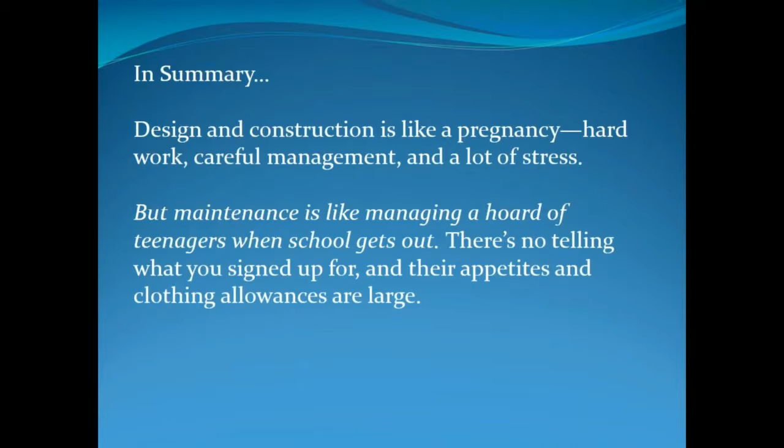I'm happy to take questions by email, but I think we have just a couple minutes left for any further questions. Mary, I'm really impressed with how much effort goes into Montgomery County's program. It's incredible how many different facilities you all are maintaining. Do you have many crews that work on this?

Yeah, sure. We do have an underground contract that works on our underground facilities, and an above ground contract that works on all our above ground facilities, and all of our LID stuff is within a crew within that above ground contract. All contractors within the county that work on any stormwater facility, it doesn't have to be county maintained. If it's under permit and there's a work order that goes to the property owner after inspection, or at any time during the year if something has to be fixed, those contractors have to go through a certification program so the county can let them know how those systems work. All those contractors know that when a property owner gives them a work order, they have to come back to our inspectors and talk about what that work is, because our inspectors are also enforcing that the work gets done. So there is a long list of contractors. They're not endorsed by the county, but they are certified by the county to do work on stormwater facilities.